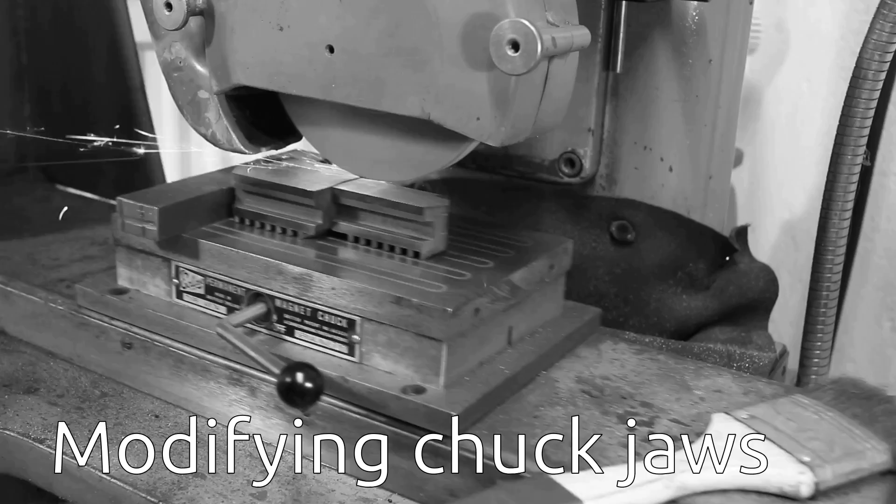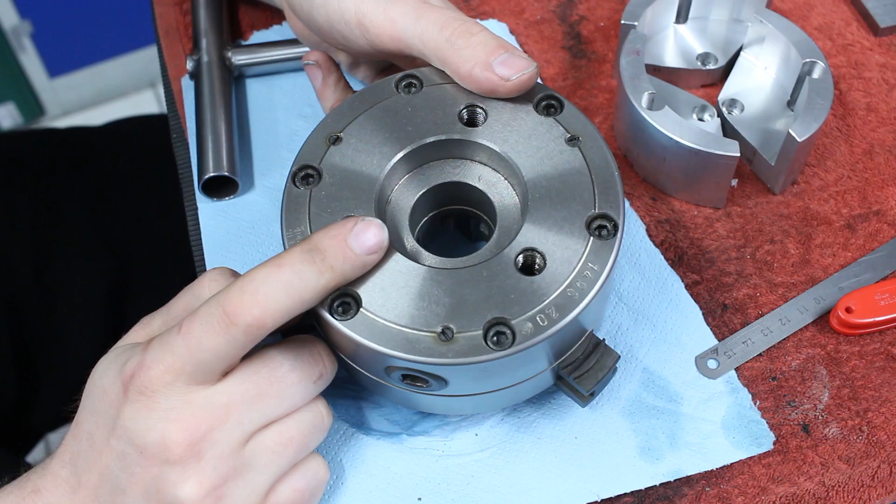Hey, welcome back. This is the 3-jaw chuck that came with my EMCO Super 11 lathe. It's a standard 3-jaw chuck with integral D1-3 short taper nose, so this fits directly on the spindle of my lathe, which is quite nice.

But I don't have any need for a regular 3-jaw with hard jaws. I have the 6-jaw, which is adjustable, and that satisfies all my chucking needs on the lathe for a scroll chuck.

But stupid me sold my soft jaw chuck with my old lathe. I had an inexpensive 3-jaw chuck that came with my old lathe, had a set of master jaws for it, and I made a bunch of pie jaws like this set here for it. When I sold the lathe, I gave the chuck away with it because it belonged to the lathe.

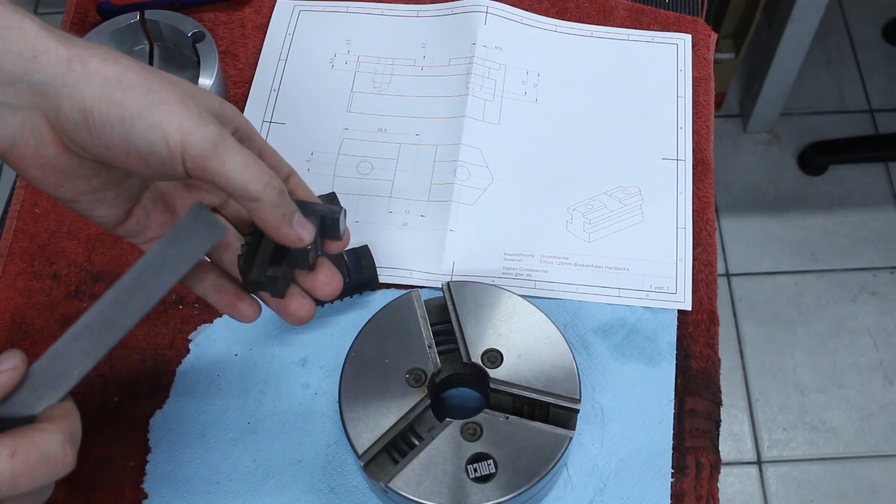You saw me annealing those back to about 40 HRC, and with a good quality file I can now file them. They are still really hard - 40 to 44 Rockwell is still very tough. Check them with the hardness test files - the 40 Rockwell C file grabs ever so slightly, so seems like we hit our hardness target pretty good.

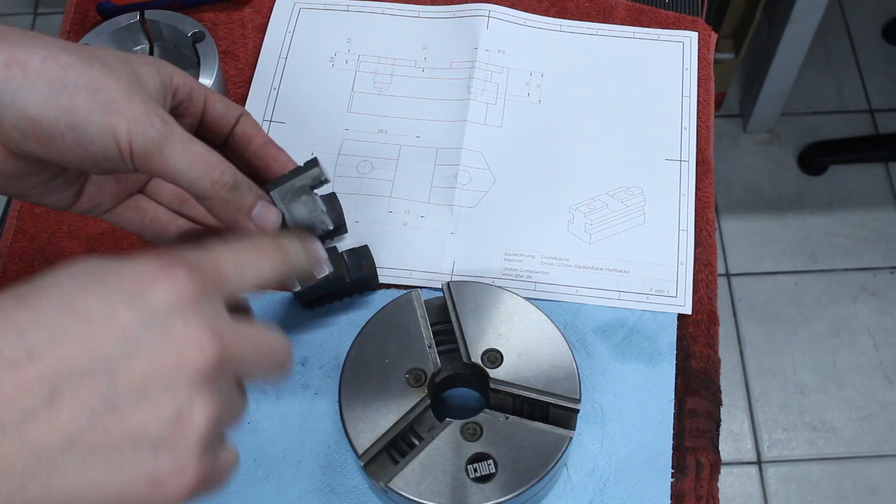Now we'll see if I can bandsaw this excess material off, otherwise I have to mill it off. Might be too hard to bandsaw.

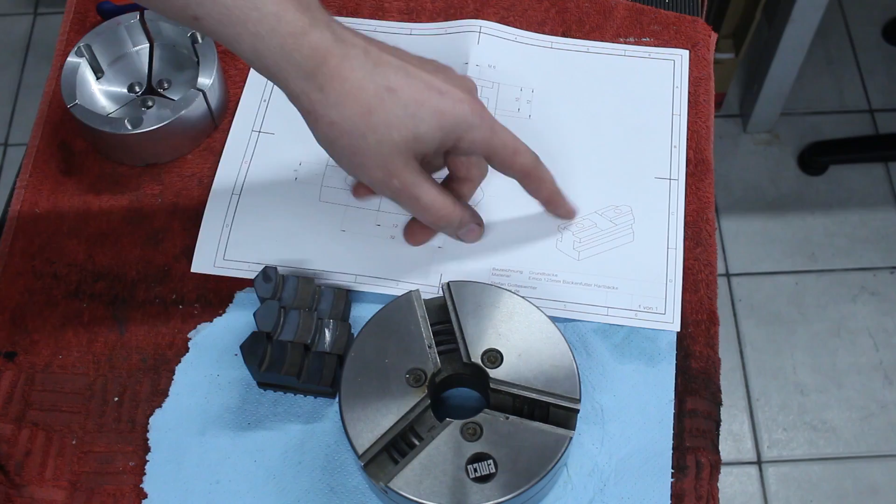I put it into CAD, drew up the jaw, and this is what we're going to make. We will remove material on both sides to create a key, almost like a key or a spline in the middle, and a cross slot that the jaw can register so it's always in the same position. And of course 2 holes threaded M6 to hold the jaws down.

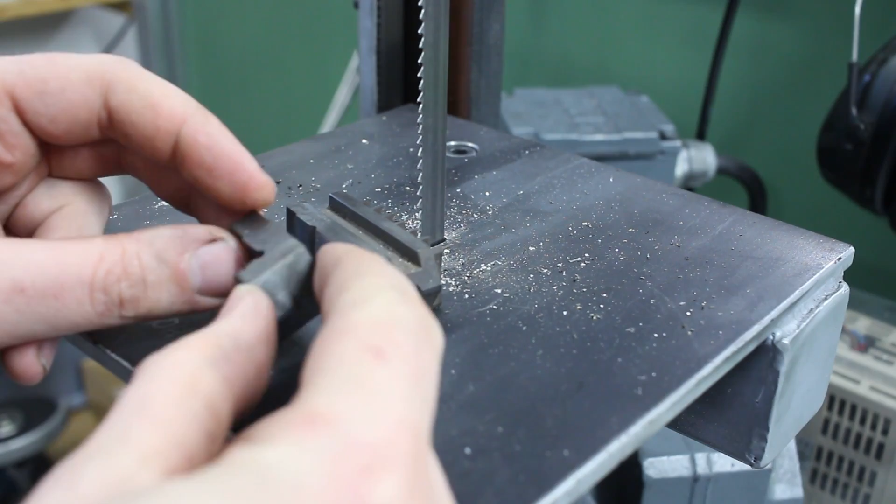I barely can bandsaw it - it's really right at the edge of being sawable with a normal bimetal bandsaw blade. Going relatively slow so I don't burn up the blade. This is not a new blade anyway - I don't want to burn up a new blade in something that hard.

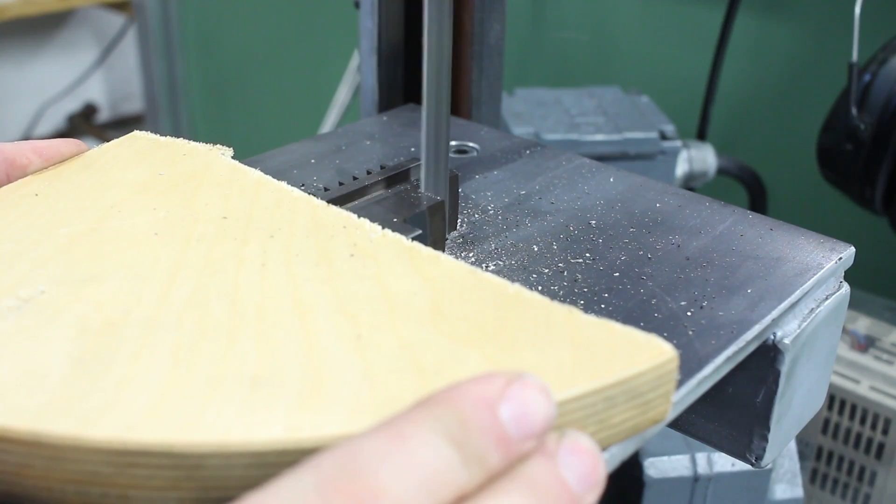So this works quite well. Got rid of all the excess jaws. There we go. Next off, surface grinder to clean off the top.

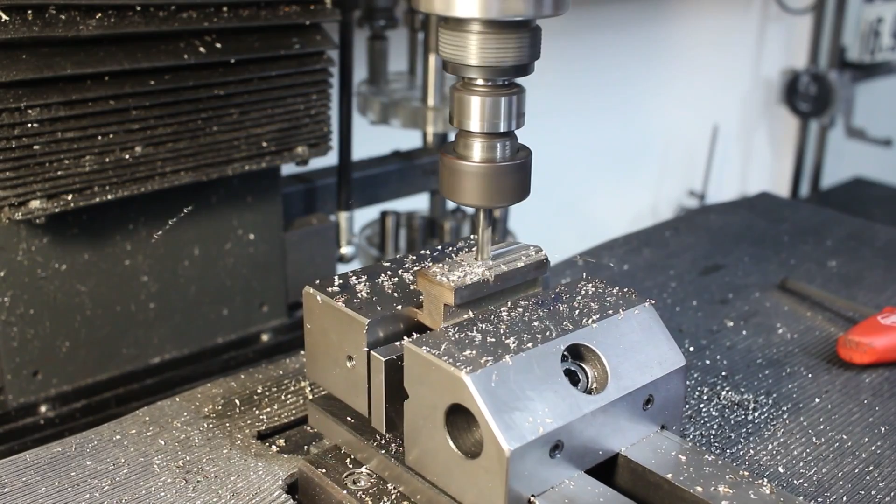That was a bit much material to grind off, an average of 1.5 millimeters. So I took a 6mm carbide end mill to it and plowed off most of the material. Now we'll clean up on the grinder and go from there.

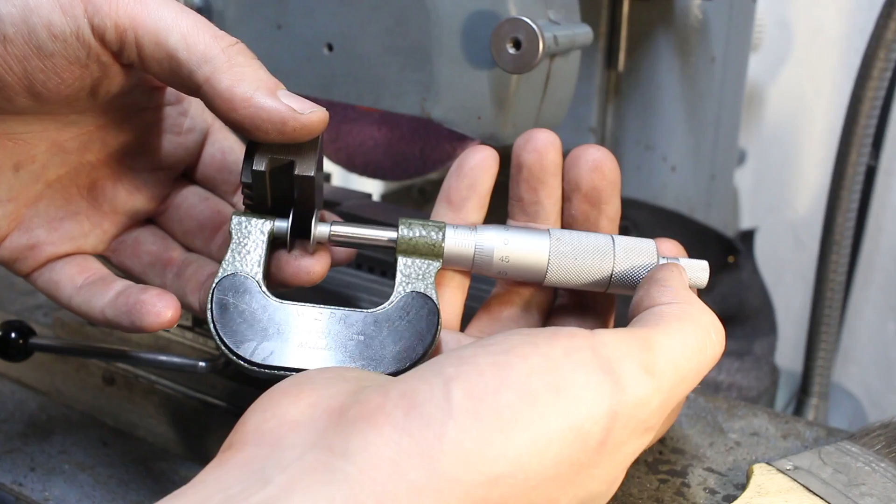Checking with this mic, we are reasonably close. One of the jaws didn't completely clean up on this edge here for some reason, but this will fall away when I mill the central spline anyway.

Okay, I roughed away most of the material now. Just full depth cut, almost full depth, slotting away all the material, and then coming back and doing a semi-finishing pass. I will use a smaller end mill to cut the relief in here, and also to finish the key here, the spline in the center, to final dimension. This face here will be surface ground.

You just saw me using a 2mm carbide end mill to finish this spline to final width, and also cutting a tiny relief in here. I went down about 0.2 millimeters. I have 0.05 millimeter or so grinding lines on this face here, so this tiny relief in back here will be enough. That's pretty much what I was aiming for, slightly below 8 millimeters.

We need to talk about the grinding I did at the beginning. That didn't exactly work out. I had the part sitting on the back of the teeth of the jaws and I ground the top surface. When I put the jaws back in the chuck body and checked if they are flat and parallel to the back side of the chuck, I had an error of roughly 0.02 millimeters. Not the end of the world, but I wasn't happy with it.

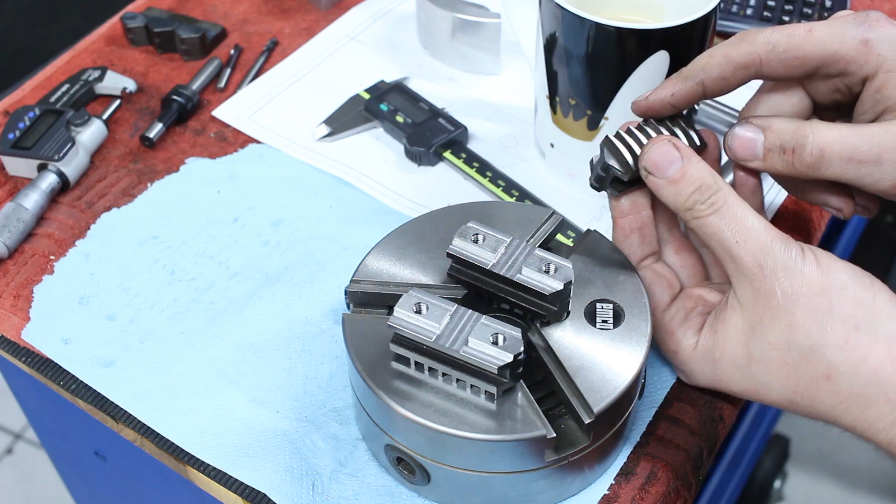So what I did—obviously that meant the slot that guides the jaw in the chuck body was not perfectly true to the back side of the teeth, which is fine, but I didn't realize that at the time.

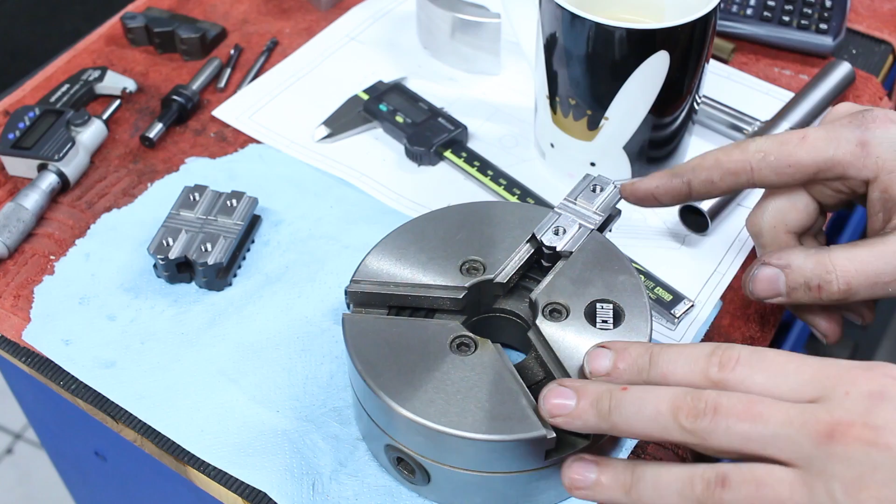What I did then, I put the jaws back in the chuck, dropped the chuck on the surface grinder, and ground the top. I preloaded it in the center ever so slightly by clamping a bushing, so everything was slightly tensioned, and then I ground the top again.

I made sure that the top surface of the jaws is always parallel to the back side of the chuck. Then I flipped the jaws around and dusted off the back side of the teeth, so this is a known good reference surface when I machined the front surface here.

Then I went ahead and milled out the slots, the cross slot here, and drilled and tapped it. Now I can go back, drop it on the magnetic chuck just like this, and grind these faces here. Then these faces will be perfectly parallel to the back side of the chuck. It's not super critical because you machine the chuck jaws in place on the chuck, but still I want to do a proper job. I want to have it as good as I can do it.

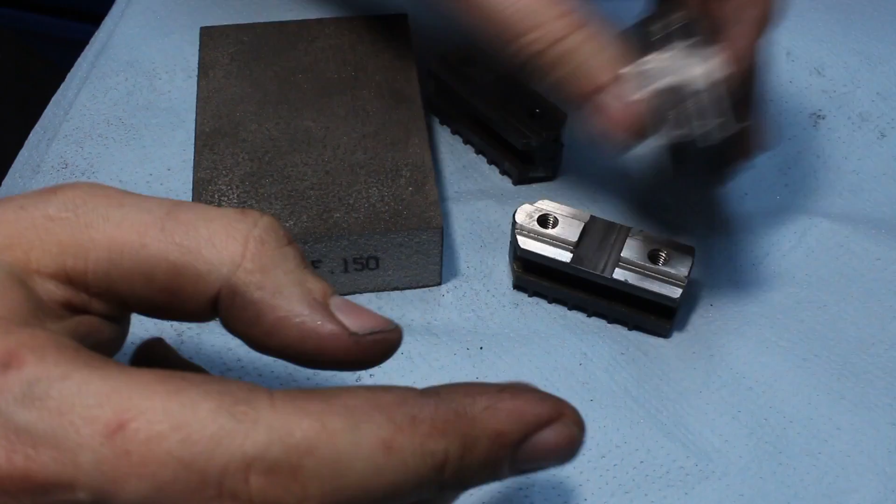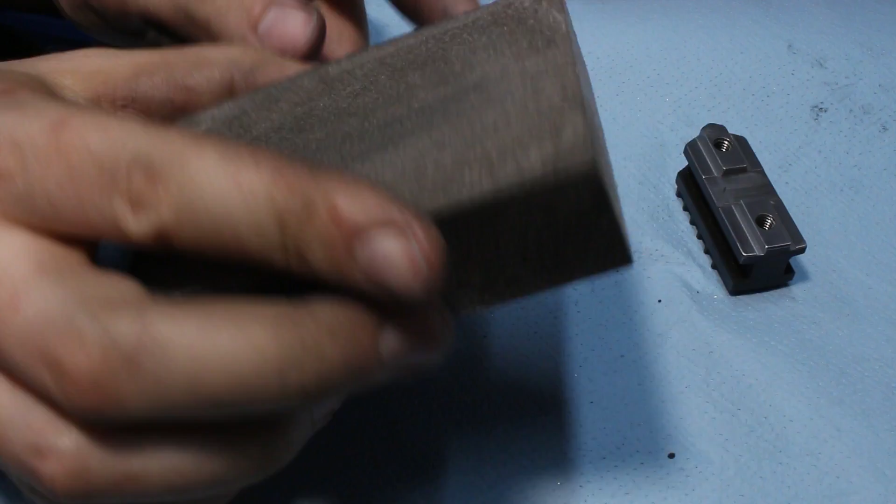Last thing that makes it look like a million dollars: sanding sponge. It attacks mostly the edges and corners and just gives it that last little bit of attention. I buy them relatively cheap, either nail polish sanding blocks or sanding sponges, or these woodworker sanding sponges. They don't really last a long time, they wear down quite fast, especially if you're a little bit clumsy like me and you tear into the foam. Then their days are basically counted.

I could do a deburring podcast where I just sit there, deburr, and tell you stories.

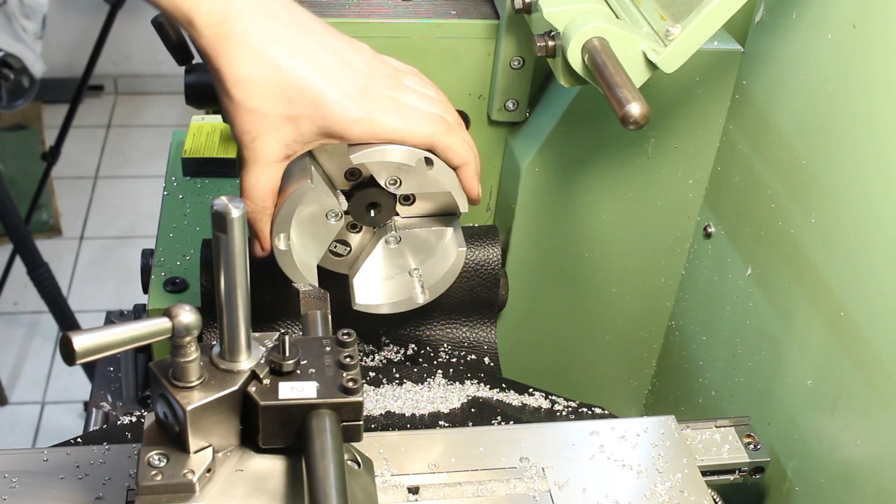Got the chuck with a set of old pie jaws. These are segmented jaws that are almost a full circle, especially useful for plastic parts. Got it preloaded here on the bottom with a piece of round Delrin clamping on the master jaws, and I'm using a large DCMT boring bar to get this to final size, so I can hold this and bore it out to a very thin wall.

That's one of the cases where the guard around the chuck is relatively nice, because between the segments of the soft jaws, a lot of chips get flung out in your face or in the shop, and you have to clean it. As I like to run a clean shop, if I can prevent dirt, then all is good.

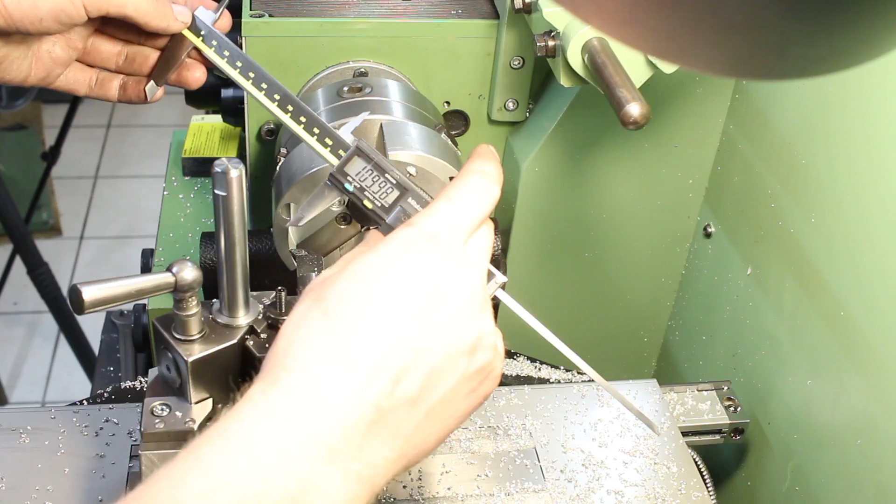110, and then I need to bore it to 100 and... there we go. That's the chuck jaws bored to final diameter.

Now we can take out the preload piece and see if we can get a nice hole. Yep, that's fairly secure. No worries with the setup that the part will come out.

And I have to do a fair number of these parts, so boring a set of soft jaws is a no-brainer. Last step is to drag the die grinder over and deburr all the sharp edges.

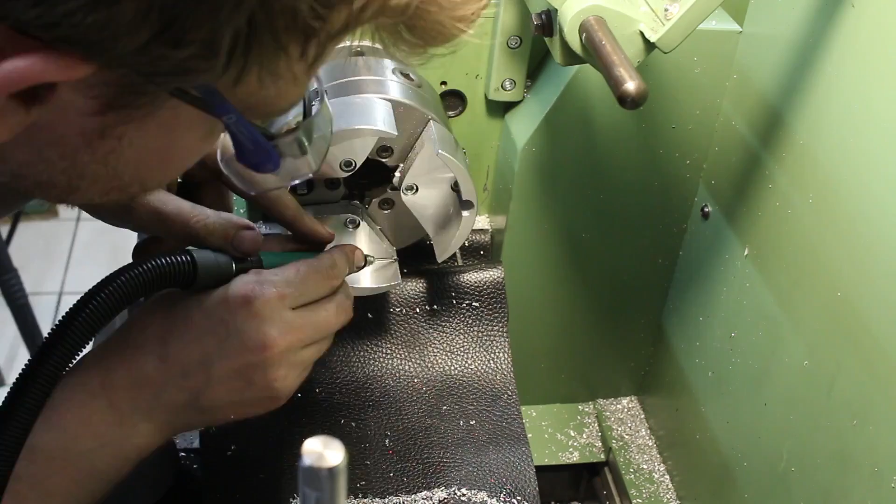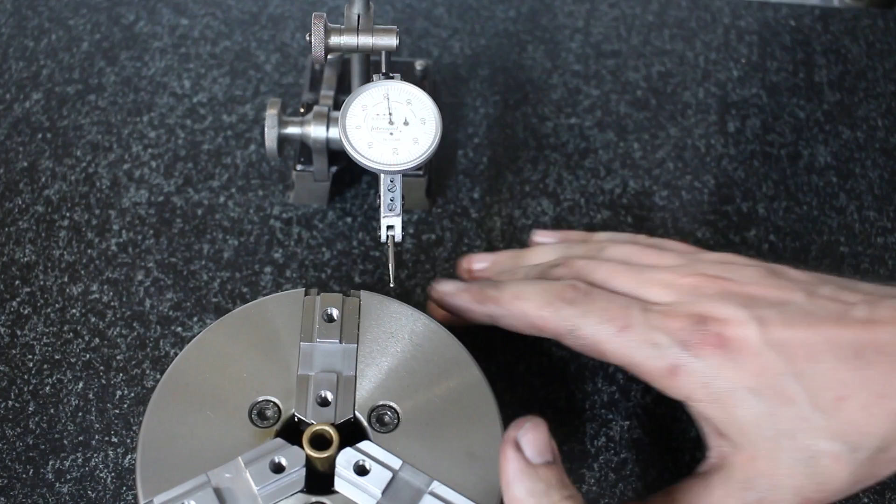Quick visit on the surface plate. I have a 0.01mm Interapid dial test indicator here in a surface gauge, and I have the 3-jaw with the master jaws, and I put a little bit of preload on it so the jaws do not wobble around. We're going to check the facial runout of these flats, which are 4 per jaw, to see if those are all parallel to the back side of the chuck. These surfaces are where the jaws rest on. As I said before, it's not super critical because you cut the jaws in place anyway, but do it properly.

So let's start here. I already zeroed out the indicator, more or less. Let's say this is 0 here. This is plus 10 microns. 0, plus 10. Let's go to the next one: 0. And, ugh, almost 0.

So, what do we get from this? I have no idea. Plus 10, plus 10, it's all slightly in plus. So the middle is plus 10, or it's basically plus minus 0.01 millimeter from the average height. Plus minus 10 microns, that's pretty okay. This is still just a chuck, and these are free to move until they are clamped down.

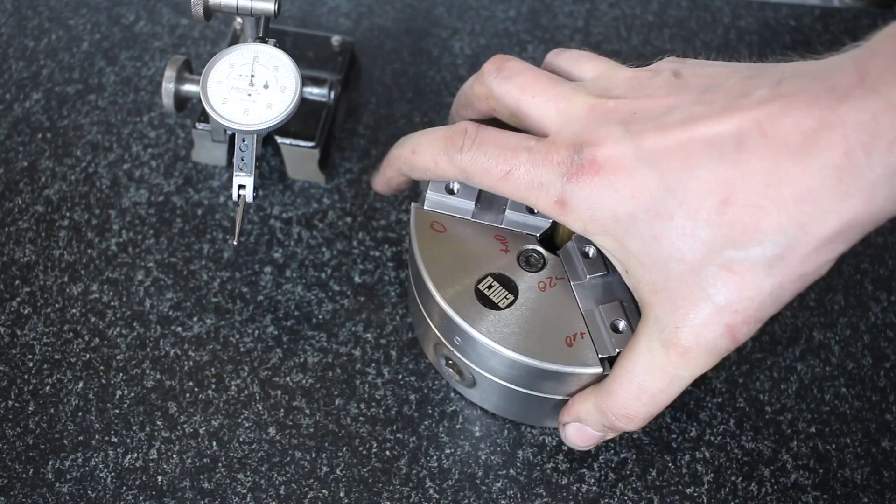That's the reason why you should always use the same pinion if you want to do precision work with a soft jaw chuck. There is one pinion on your chuck that's marked, and normally the zero mark does not really say anything. It just marks the pinion that was used to preload the jaws when the hard jaws were ground. If you're working with soft jaws, you can use each one of these, but you should always use the same one. Most easy is just to use the one with the 0, because that's the easiest to remember.